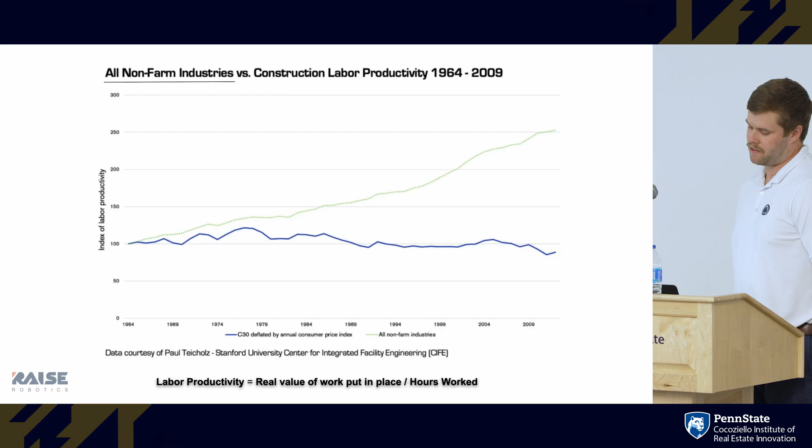When I was putting the slide deck together, everyone likes to point out that construction is not as productive as other industries. I was curious what industries construction was more productive than, specifically in the last 30 years. And the trend you'll notice is construction is more productive than labor-heavy industries, or industries that have significant regulations. This makes automation adoption in these industries very difficult.

And I think if you look at hospitality, it's low-skill work that you're trying to offset with the usage of automation. Obviously it's very challenging to get a very expensive robot flipping burgers to see a measurable ROI for small restaurant owners. We are still seeing advancements in both hospitality and healthcare, but it's not as wide of an opportunity as construction.

As the labor has continued to become more difficult to find, the price per head continues to go up. As such, the integration of automation and the decrease in price point for automation makes this very viable to integrate cost-effective automation and see real ROIs compared to manual labor.

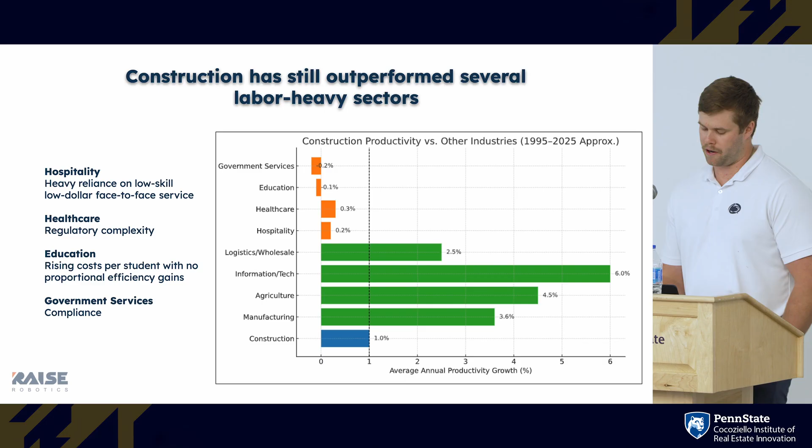Digging into the third and final obvious bucket for why automation is needed: safety is still a problem. Everyone's seen how things have changed in the last 20 years in construction. There's a lot of regulation and safety precautions put in place. It has improved safety, but it hasn't solved the entire problem, and that's the unfortunate truth. Construction is still the second most fatalities per industry, just lagging behind logging by a mere percentage point.

It accounts for 20% of all industry fatalities. Looking in the last two years specifically, there's actually been an increase in non-fatal recordables on site.

One statistic becoming very top of mind for contractors today is the growing issue with mental health within the industry. It's a stigmatized industry. People don't necessarily always feel appreciated, and they don't have a lot of the same benefits that other industry workers have. As such, you're four times more likely to see a construction worker committing suicide. Looking at 2022, there were over 6,000 construction worker suicides.

This also leads to an amalgamation of the safety statistics. Falls from leading edges are the number one cause of fatalities within construction, but we don't know what the actual cause of the fatality was, or if it was purposeful in nature. So this is something to keep an eye on.

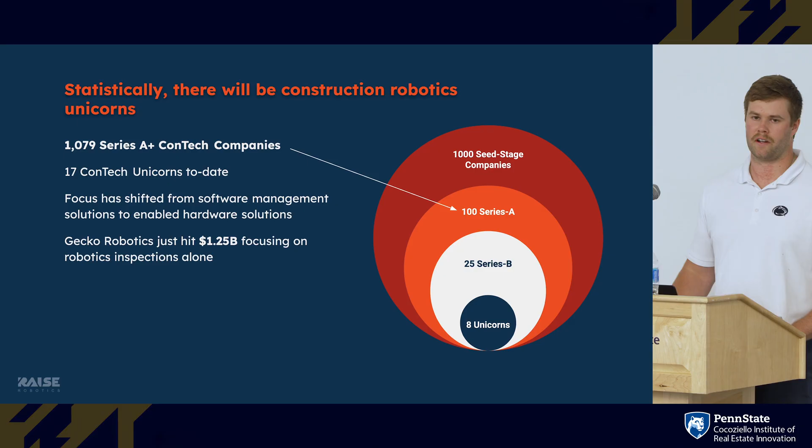And there's been some other complementary trends that have come to market over the last couple of years. The biggest one that ultimately enabled us to become a company was the commoditization of sensors and compute. Advanced technology has never been cheaper, largely due to advancements in autonomous vehicles, warehouse robotics, AMRs. Everything's coming down in price to the point where it's actually cost effective to prototype, test, and build within a dorm room, then come out of college and enter your product into market.

Additional levers that have influenced adoption have been the acceptance of AI. It can be a touchy subject, but largely the public recognizes the benefits and accepts AI solutions. The same goes for drones. Sorry about the redundancy on the first slide.

And then looking at manufacturing and academia. So I mentioned AMRs, vision systems are getting better. This is compounded by both bin picking in manufacturing facilities matched with academia. And collaborative robots have become mainstream in many manufacturing settings as well, so you're able to work around automation, which hasn't always been the case. Before you had to have very stringent safety and machine guarding, similar to a CNC machine, you were unable to actually collaborate with the robot, but now you are.

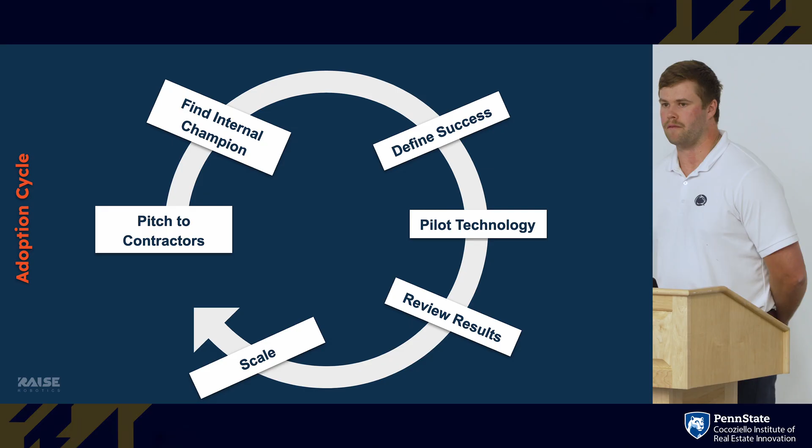For technology specifically, it's extremely important to find an internal champion within your organization that can help carry your message to other members and help run the numbers on the ROI calculations for the organization as well.

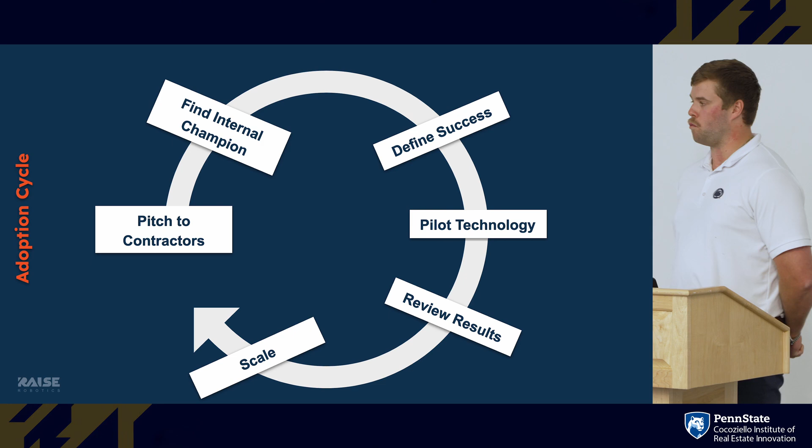Before you test on site, you have to establish success metrics. What we're doing now is establishing these success KPIs, and once these are achieved, it'll immediately turn into a larger scale adoption across the organization.

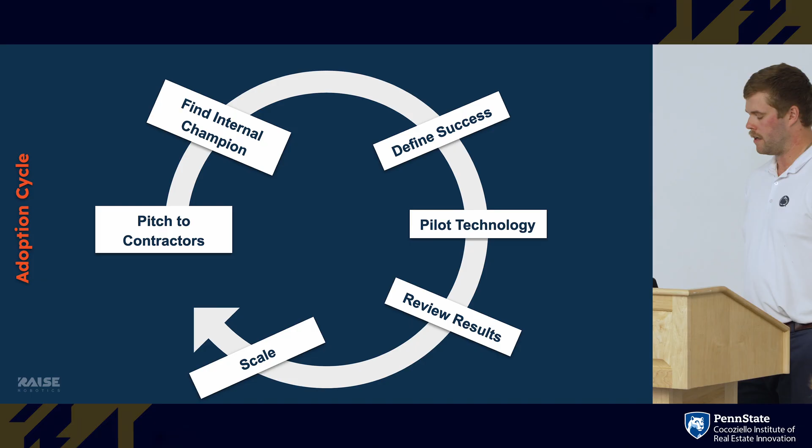Otherwise, you can get stuck in a loop between establishing KPIs, piloting, and reviewing results. After this has been accepted and the KPIs have been met, this is where you scale with the organization.

What we've seen time and time again from other companies in the space, and even ourselves, is getting stuck in this doom loop, pilot purgatory. This is largely due to regional fragmentation or company fragmentation.

Again, your project champion being on the innovation or VDC team doesn't necessarily mean they have the power to force organizational change. Having unrealistic success metrics that maybe you can't meet is another issue.

One example of this that we just ran into yesterday: we're getting ready for a TI project drilling dowel pockets in a very large retrofit. When we asked our project lead what the expectations were on cycle time, we were told between 30 and 50 holes per hour.

We worked with this contractor for two weeks before this and took cycle time measurements of their crews on site. In two weeks, they completed 200 holes total. But the metrics for adoption were now a quarter of that within an hour.

So it's important that you, as the startup, also do your diligence in the cycle time estimations. You come up with something that's reasonable at the end of the day.

Okay, then talking about the current robotics landscape. We're in a very, very exciting time for construction robotics right now. We're starting to see the commercialization of a lot of robotics companies, and they don't look like research projects. They look like real equipment, and they're being used as such.

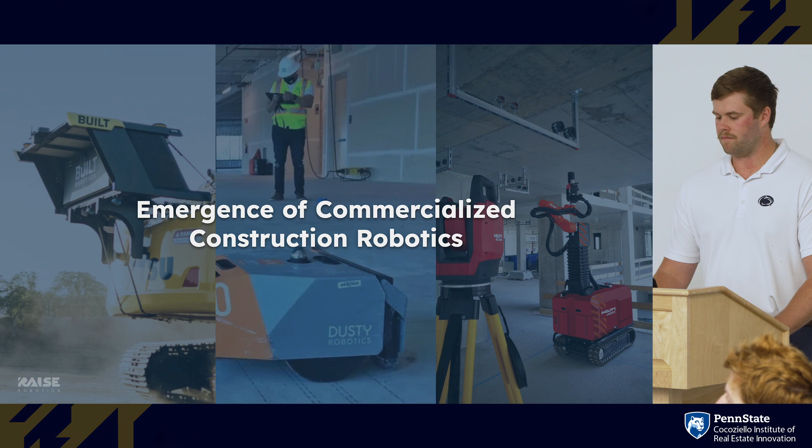You have your innovation trigger, which is a product that needs to be brought to market. Then the peak of inflated expectations—this is where there's way too much hype around certain solutions.

Trough of disillusionment—this is where people are going to say this is never going to work, there's no way forward. Slope of enlightenment—this is where there's a little bit better reception to adopting these technologies again. And then finally, when it's just a normal product in the market, this is the plateau of productivity.

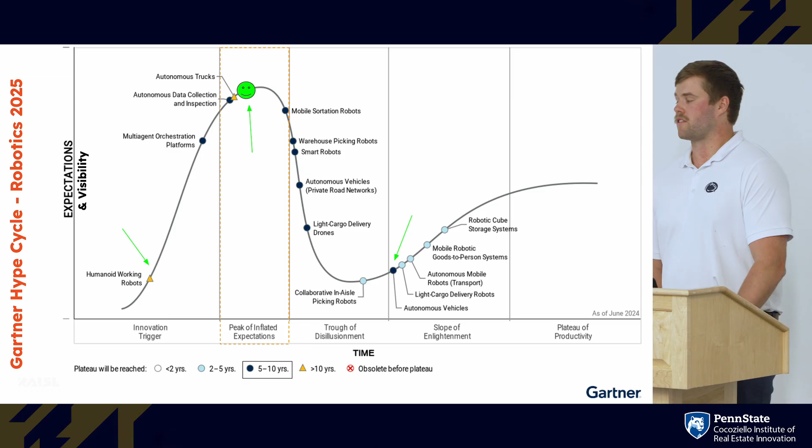If we look at this right now, I have to say, with as much hype as has been going into the space, largely the fact that we're seeing more executive teams leaving large tech companies, they're raising $100 million rounds with no product. There's definitely too much hype in the space right now. But there's still products adding value to customers. With the digital foundation items I mentioned for contractors, we're still a little ways away from that plateau of productivity. I'd say it's probably in the 5 to 10 year range right now.

So digging in a little to the on-site mobile robot taxonomy. What's out there? What are the classes? If you look at BuiltWorlds' classes, I don't necessarily agree with their taxonomy. This is kind of how we see it in the market.

So you have single-purpose robots. These are robots like Dusty, rugged layout robots, finishing robots, painting robots, just doing one targeted single application. The benefits of this: it's exceptional at a singular task, designed just for that task. I'd say this is similar to a specialized tool at the end of the day.

The cons: because it's only doing a singular task, if you're the contractor adopting this technology, say you're buying a layout robot, and your layout for a data center is going to take 10 days, 2 weeks. Unless you have 26 data centers, there's no way to get 100% utilization out of this equipment because it is single purpose in nature. As such, we see a lot of single-purpose robots get shelved, and this is a dynamic people are struggling with right now: how to optimize for uptime when just focusing on a singular task.

What ends up happening is the customers don't want to adopt on an annualized basis or purchase outright. We see that these suppliers then have to be in charge of the distribution, oversight, and logistics of the robots, since the customers won't adopt at a larger scale. So it's harder to scale, limited market channels since it's very specialized, but again, exceptional at doing that task.

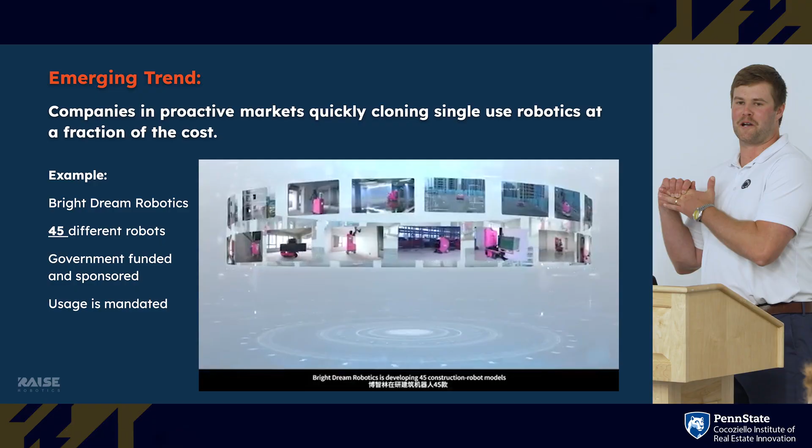I did want to talk about an emerging trend we're seeing in the market. Is anyone familiar with Bright Dream Robotics? No, you should be.

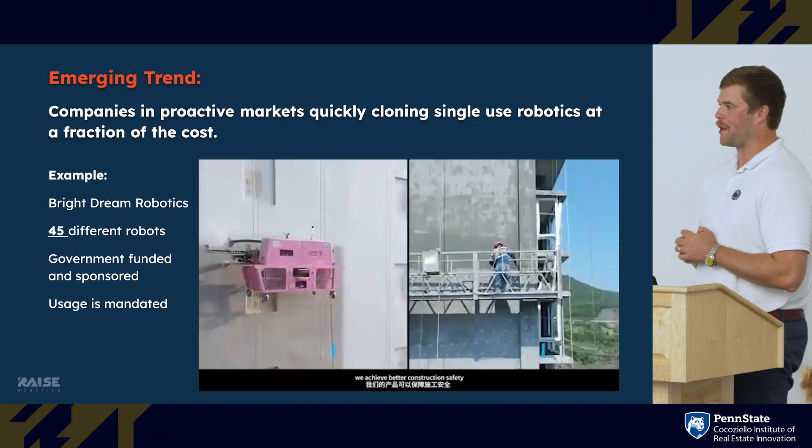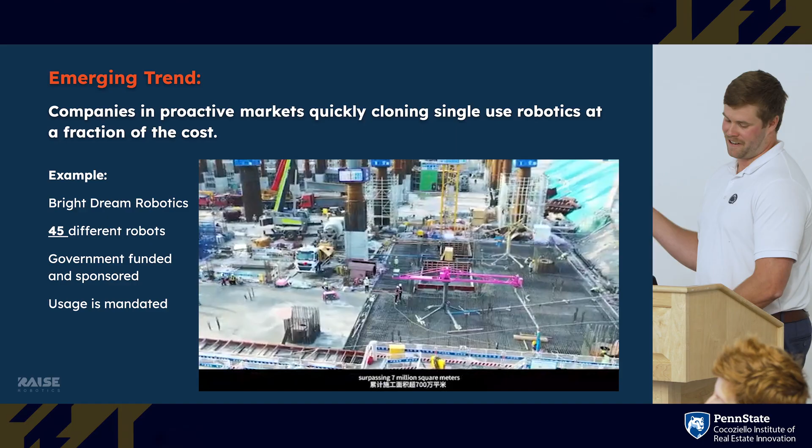So this is a trend we're seeing in proactive markets like China and Singapore right now, quickly cloning single-use robots that exist in the United States and Israel, scaling them with the support of the government. As such, you're seeing companies like Bright Dream, which have completed over 350 projects, have 45 different single-use robots, they're government-funded and sponsored, and the usage is mandated. So they have a very quick path forward being in this proactive market. This is something to keep an eye on.

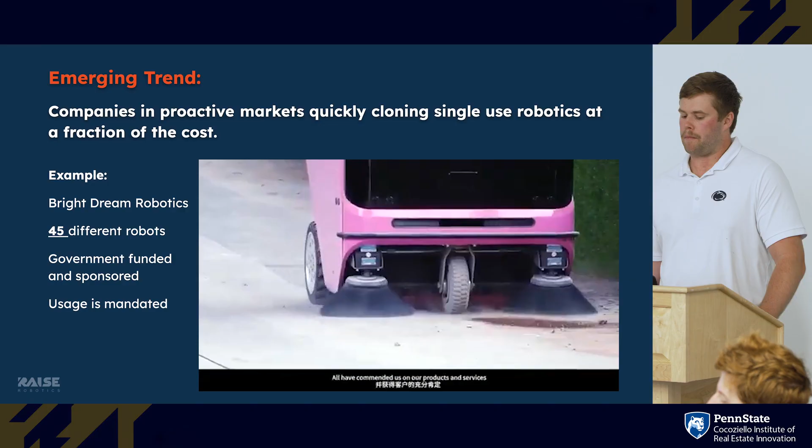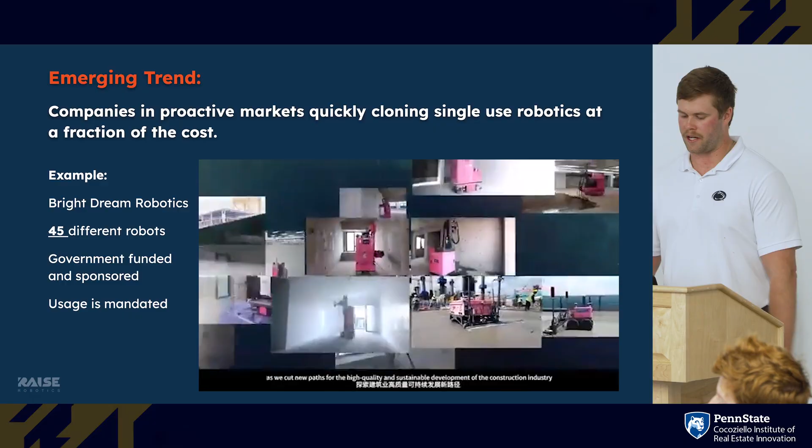One downside to companies like Bright Dream Robotics: it's very easy to clone and scale these solutions. It's not easy to clone and scale a high accuracy solution. So that's kind of the technical moat we're seeing in the marketplace between a proactive and reactive market right now.

Okay, did want to do a little role play. You're a general contractor looking to minimize project delivery risk on your upcoming project. Would you choose independent electrical, mechanical, and plumbing contractors, or one qualified contractor that could handle all three scopes of work?

Asking the audience, what are the risks associated with having more subcontractors? Whose fault is it if something goes wrong? Liability is definitely one of them. Any other answers? Conflict in scheduling? Yes, exactly.

So this is a similar kind of thought process that is going to be evolving with robotics in the future. Thinking 5-10 years in the future, does it make sense to have 100 robots doing 100 things on site? It's hard enough to manage subcontractors on a project. It's going to be impossible to manage robots that are all programmed in different languages, with no cohesive, universal oversight of these robots acting on the same project. This is why we're really leaning into that multi-purpose robot platform. It limits risk to those adopting it in the future.

And then taking a very broad stroke here, if you're studying construction robots, please don't be scared with this oversimplification. I've broken it down into five primary buckets. Pretty much every construction robot works the exact same.

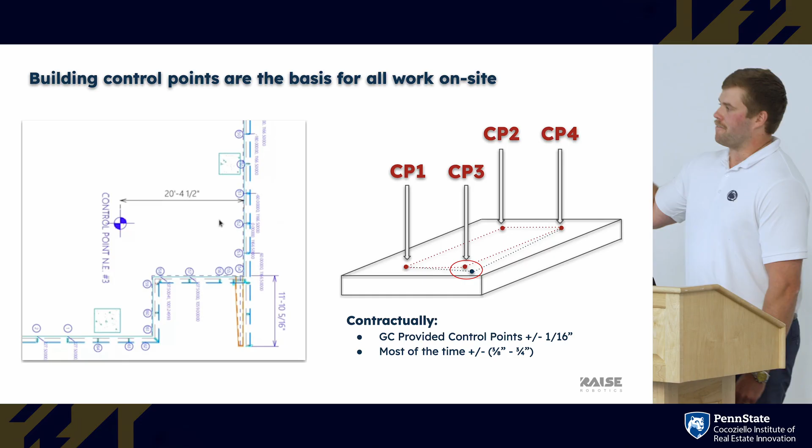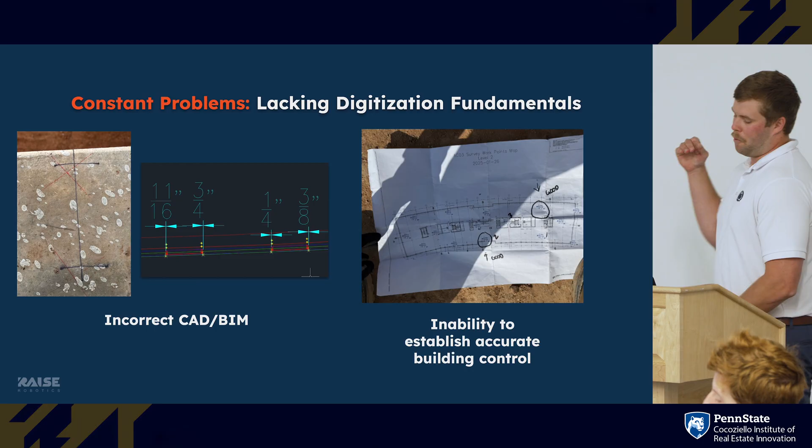One thing that we notice outside of control being an issue is that we're receiving incorrect digital inputs. This comes by way of CAD and BIM. This is directly from a previous project. On this drawing, this is the overlay of a glazing contractor and a precaster. All of these are supposed to be 0, 0. These should be perfectly overlaid on the CAD outputs. Almost an inch error, 3/4 inch error.

What we ended up finding is the general contractor submitted 2 different drawing sets to each contractor. They fabricated components to 2 separate, completely different drawings. As such, we're laying out with the robot. We notice that the precaster's coming over, and we're like, that looks weird. We should be dead nuts. We're at a 32nd in the lab. We don't understand what the problem is. Dig into the drawings, huge issues with the drawing sets.

Same project, these are our control points. We get on site, instantly flag control issues, escalate it to the general contractor on site. They send out their surveyor and field engineering team to lay out 15 points. They say, we'll make sure the job site's covered, you'll have all the points you need. 15 points, we get 2 good points that are within the allowable tolerances.

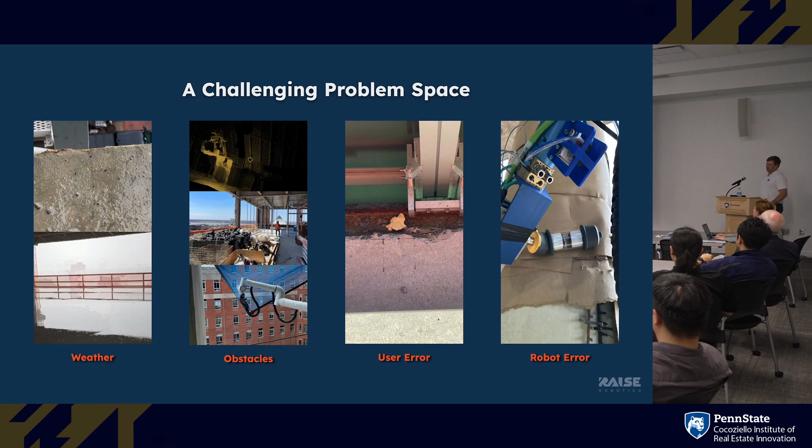Outside of this, it's obviously, looking at it from the robotics perspective, a very challenging problem space. This is also what makes it very exciting for the suppliers and technologists in this space. You're applying manufacturing level accuracy to a dynamic environment. You have robots working outside in weather. You have new obstacles that pop up on every single job site, every day, every hour. Your path of travel gets blocked. Ultimately it really tests your communication with others on site.

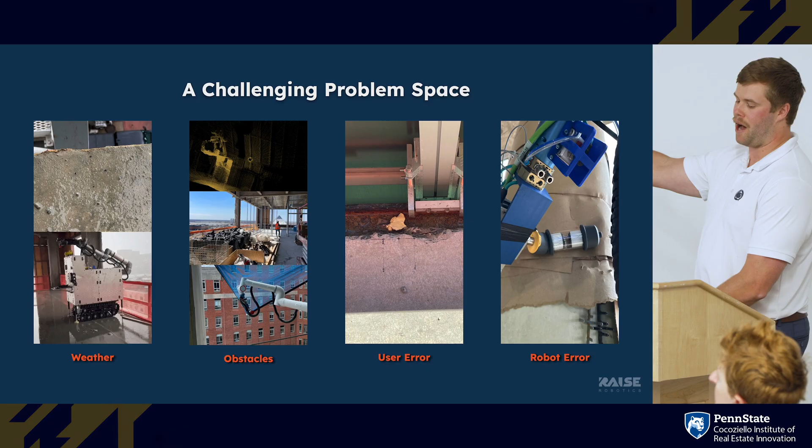And then you can still run into issues with both user error, incorrect inputs, incorrect drawings, or robot error. A condition was not modeled in our rendering for the robot. We forgot to add the reflector to the end of our robot. We path planned without the reflector, ran into a column and broke the reflector. These are all things that happen during this kind of innovation, development, deployment lifecycle.

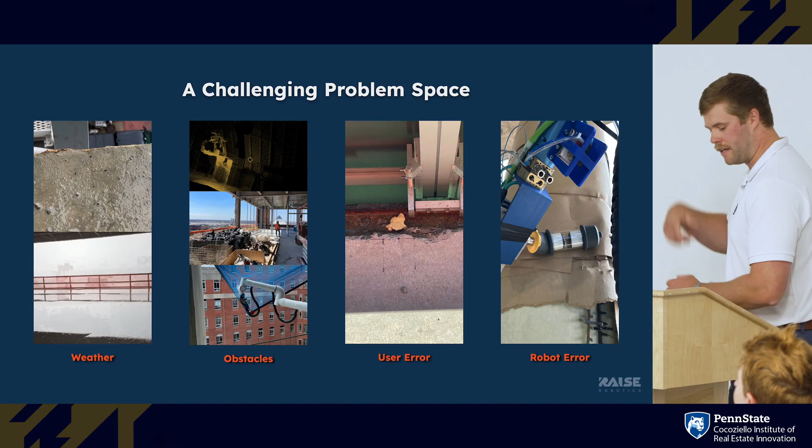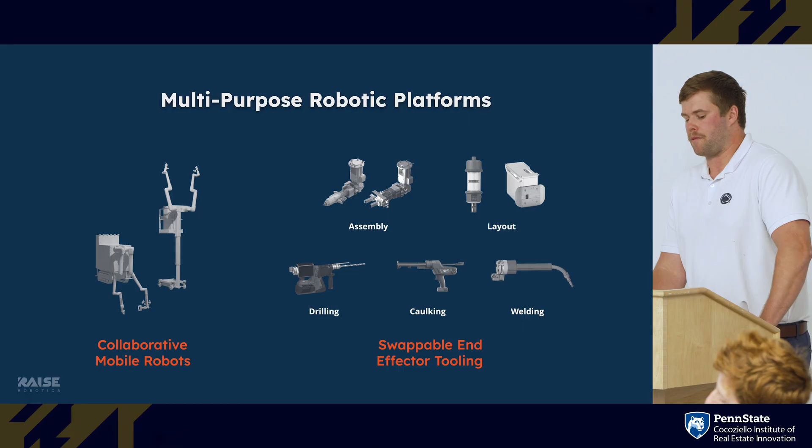All right, moving on. Our company, Raise Robotics. Again, what we're building: multi-purpose collaborative mobile robots for on-site construction and industrial applications.

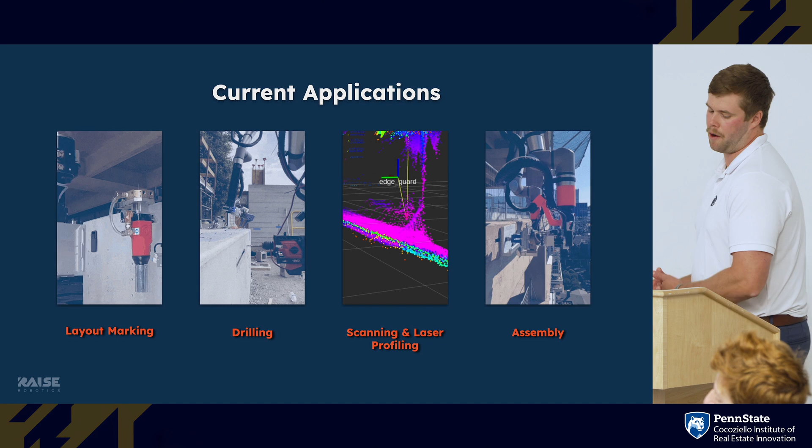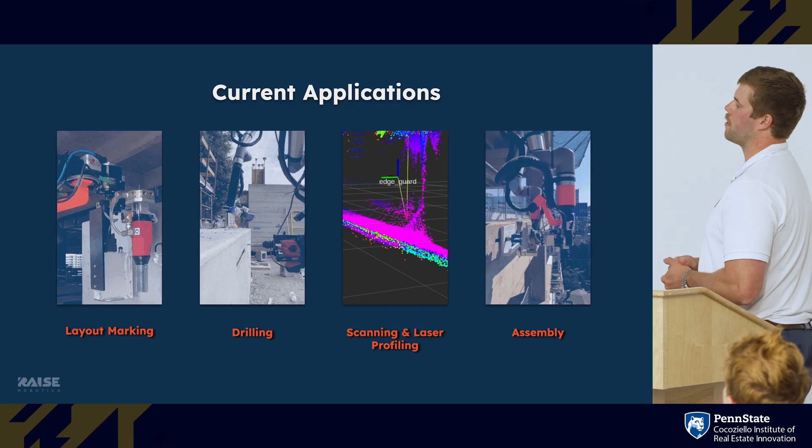As far as our applications that we're focused on right now, it's primarily leading edge applications. That's where we're servicing layout marking, any geometries, text, emojis. We can print them on the slab while working behind the edge guarding. This is leading edge, walls, ceilings, up to 13 feet. We are partnering with a mobile equipment lift provider that will allow us to apply all of our technologies into scissor lifts and boom lifts here in the next 6 months.

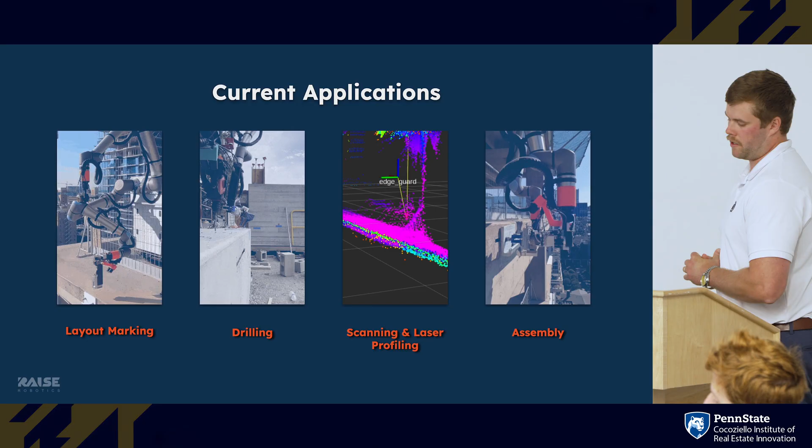In addition to layout marking, working in drilling, scanning, and laser profiling, as well as assembly of facade systems. This is just another quick video from some previous project work.

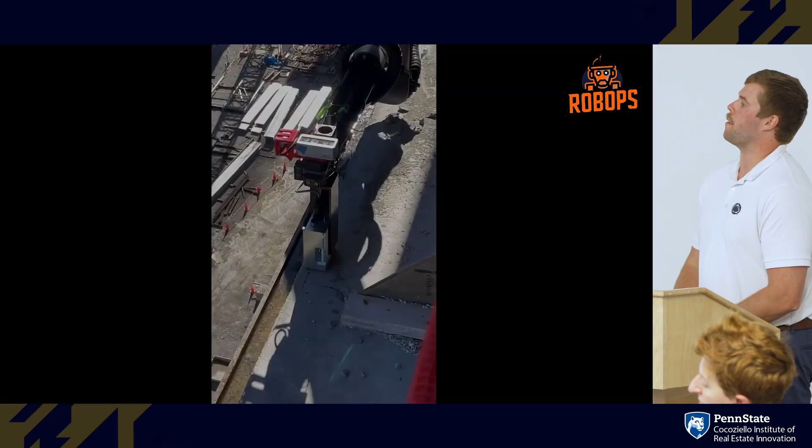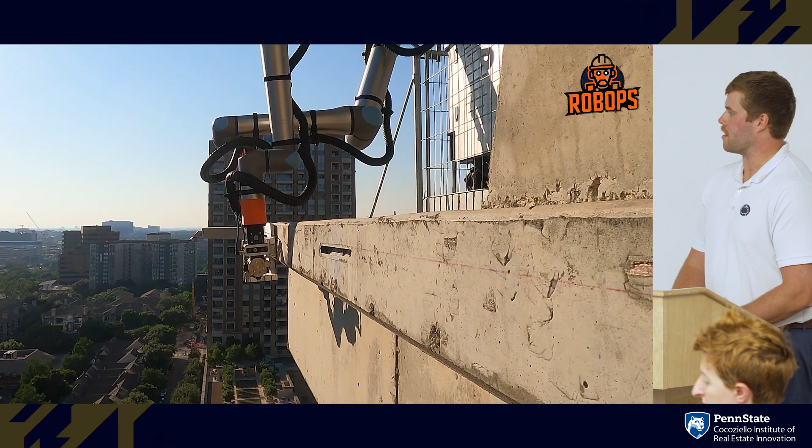We have both single arm and dual arm robots. On the back of the robots there is essentially a toolbox, very similar to a CNC machine and how it's able to actually swap between the tools. It's all pneumatic actuation. The entire robot is IP65 rated, so it does stay outside for the duration of projects. When it gets shipped to a project, it gets shipped on a flatbed, untarped, similar to any construction equipment.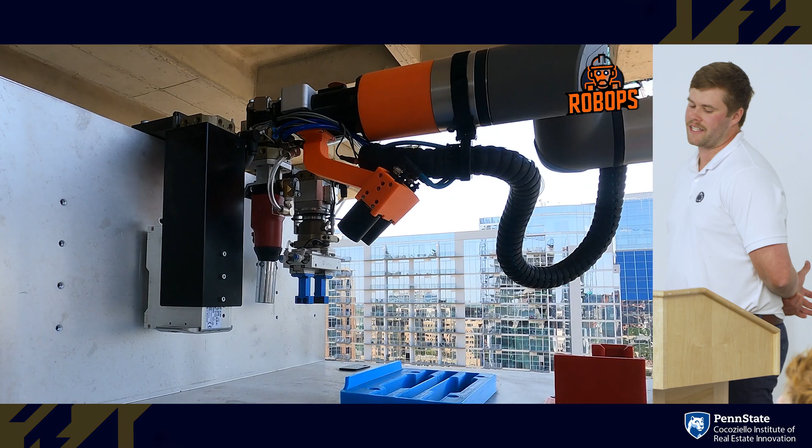You can see here computer vision outputs, applying a lot of that same AV technology for human and obstacle recognition into component recognition that allows us to actually interact with multi-step assemblies and ultimately install these brackets faster than a crew can do it.

One of the major benefits with the application of robotics within construction is the ability to collect data passively. This is a massive benefit. Robots are data magnets. You don't need a QC QA team to come back and actually check work. The robot can complete that while the work is in progress, unlocking further benefits in production rates.

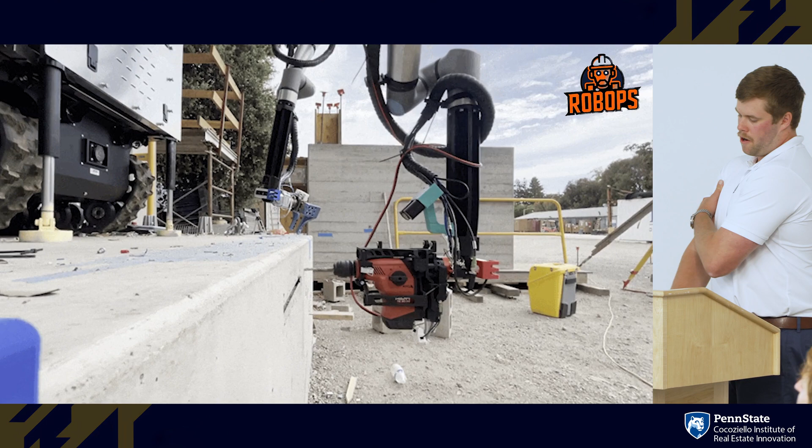And then here we got our drill. We've co-developed this alongside Hilti. We're scaling up this line of business significantly in the next couple of months.

Our market sectors: new build commercial construction, focused on self-perform general contractors as well as facade specialty subcontractors. TIs, we're kicking off our first industrial manufacturing applications, for an EPF manufacturer who does tanks, vessels, and skids, marking where things need to be cut, where they need to be welded, how they need to be welded, using the laser profiler to also inspect the components coming in to give them a right of refusal for $100,000, $200,000 components.

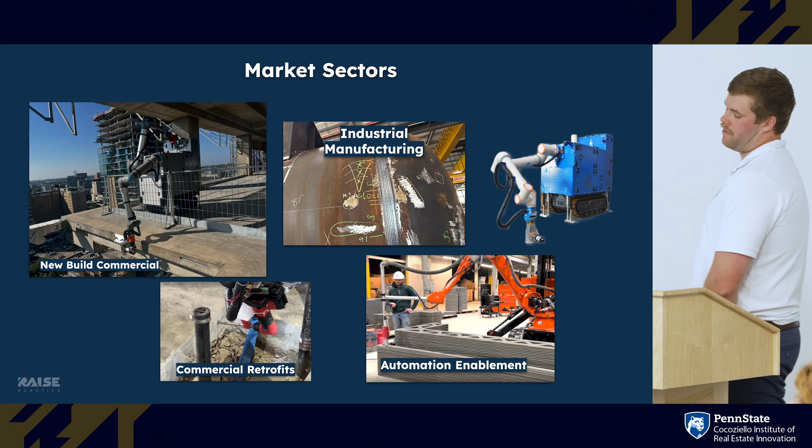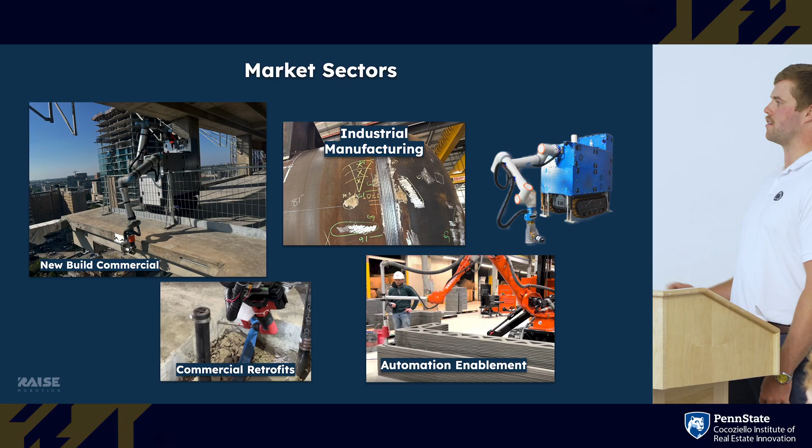What makes us us at the end of the day? Our positioning—our localization stack—we're able to achieve plus or minus 1/16 inch in field conditions on a very large machine, and we will be achieving that same tolerance even at height. This comes down to how our robots are calibrated and how we're able to overcome a very dynamic environment.

Our vision and motion planning is what ultimately allows us to work off very minimal information. A lot of robotics providers now require BIM inputs. The reality is many contractors don't have BIM inputs; they have 2D plans that are in the field in a job box. That's all our robot needs to get working, because we're able to fill in those knowledge gaps with the live inputs from our vision and motion planning softwares.

And then haptics—force sensing and feedback—being able to complete work blindly. For our bracket installation use case, we're able to train a model to actually install a bracket without seeing anything from the computer vision inputs. It's very similar to changing your oil in the blind. We're able to feel when those bolts were slotted within the anchor channel to actually complete an installation.

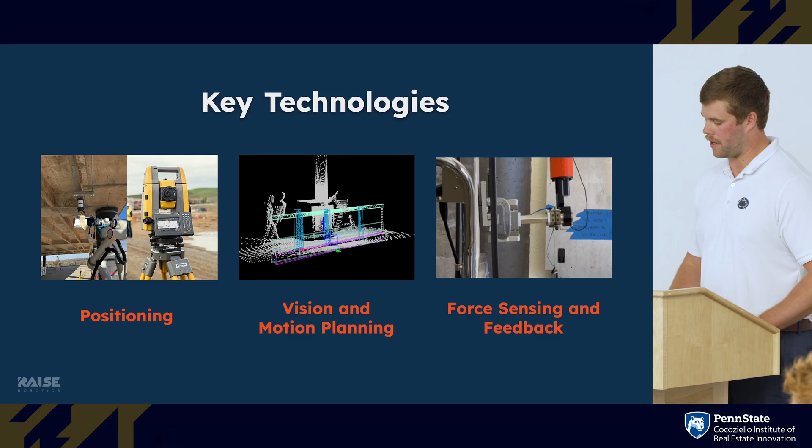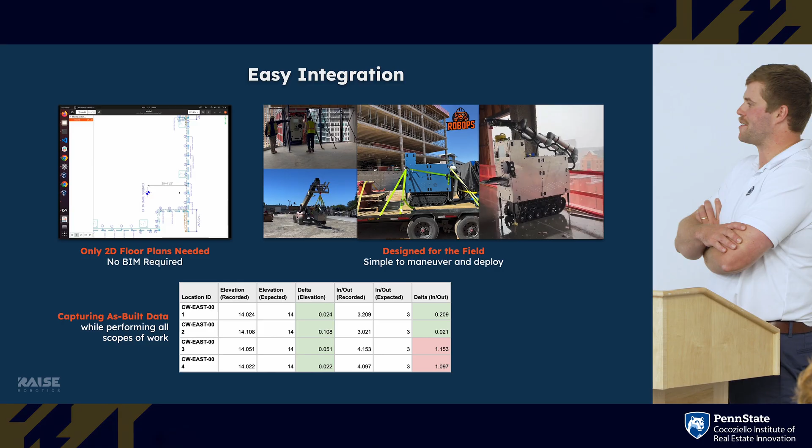Even furthermore, building out robustness in the software capabilities and ensuring that worst case scenario, if the vision system goes down, we're not losing a bracket off the side of a building. This leads to increased ease of integration for our contract partners. We're not reinventing the wheel with inputs required to the robots. That's a massive undertaking and a huge issue for a lot of other construction robotics companies that require BIM integration and BIM inputs. They end up having to upsell BIM services on top of the robot rentals, really pricing themselves out of the market. We're designed for the field—deliver on a flatbed, fit in the smallest hoist.

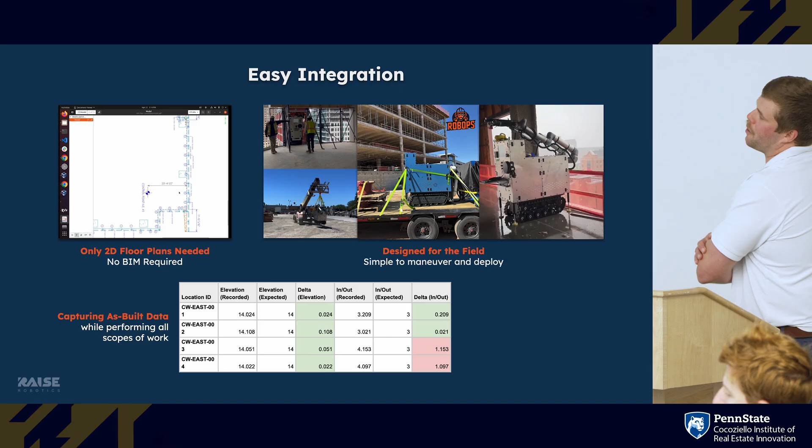We've just shaved off 300 pounds from the robot with this scissor lift integration. So it will look a little bit different, but it'll be using the same back end, same tooling.

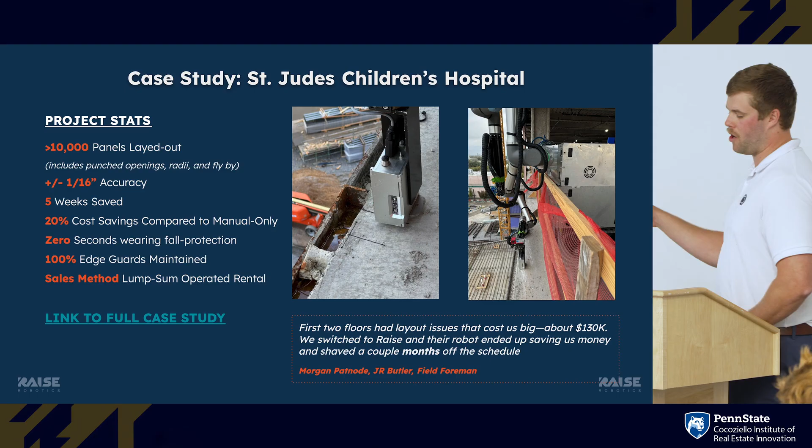One recent case study from St. Jude's Children's Hospital: completed the layout for a 14-story hospital building at plus or minus 1/16 of an inch accuracy, shaved off 5 weeks of the schedule, 20% cost savings compared to manual-only methods. No time spent beyond the edge guarding, so 100% committal to ensuring safety of today's workers. No high lines needed to be set up. And for this project, it was a lump sum operated rental.

I will say there is a lot of pressure on suppliers like ourselves to provide the staff to either oversee, set up, or use the products. Many customers want just a drag and drop adoption. They don't want to facilitate the upskilling of their internal teams to adopt.

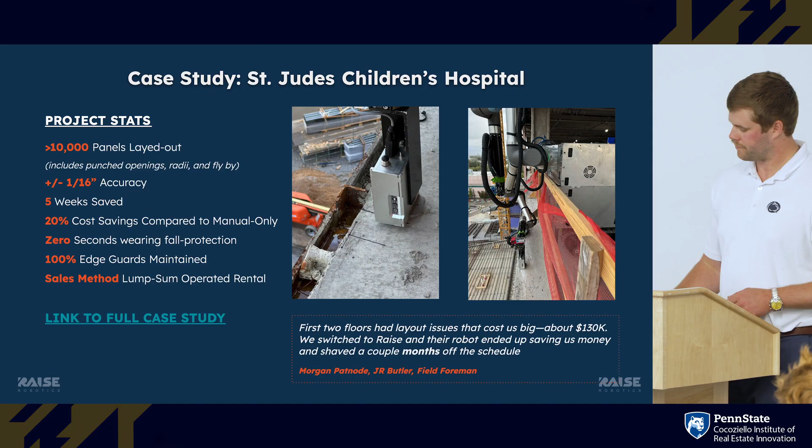Okay, so right now we've completed over 4,000 hours in operation. I think one thing that is very different for us, we're partnered with the unions. Our approach has always been improving safety, improving the longevity of careers within construction, while also attracting the next generation of construction workers. We kicked off our first Train the Trainer series about 2 weeks ago down in Philadelphia. Trained 12 union employees, gave them a test, and all 12 passed, which is a testament to the ease of use for our robots.

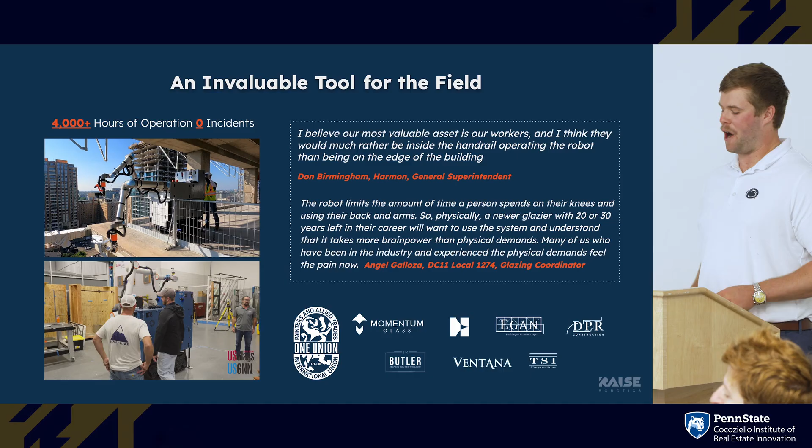We did have some passionate conversations during that meeting as well, and it really showed where a lot of tradespeople are at in viewing automation. Immediately, it was a high-tension training for the first 2-3 hours, and you could feel something was bubbling in the room. Someone raised their hand and said, this is taking my job. They said, if you're doing multiple applications, it's taking more of our jobs. And it turned into a town hall debate between two sides of the room.

You had union people that view it as a tool or a piece of equipment - something that improves our livelihood, improves accuracy, ultimately enables more work to be won from contractors using the technology - versus the people that were just scared of technology. It's a very real fear that's in the market now. By the end of the conversation, it devolved to a point where we were debating what is the purpose of being a human at the end of the day.

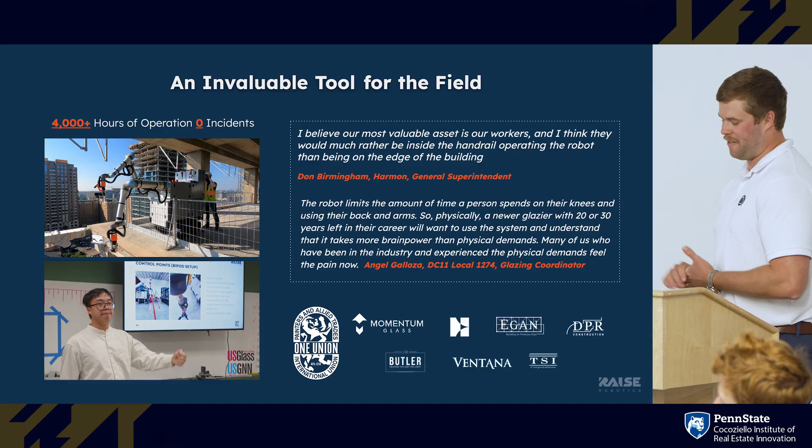So there's still speculation. The reason I brought that up - by the end of the class, everyone said they saw the robot as a tool, and it is something they would use, which is a testament to usability, but also you've got to demystify these things.

If you look at the video here, the first thing that we did when we got the robot in the classroom, they said, take off the side panels, we want to see what's inside. So we did, we took it apart. Everyone was able to touch everything on the robot. When you see components that you recognize, like an onboard compressor, that's a pretty cool compressor - there are items that are shared experiences that enable a more demystified release of technology and adoption of technology.

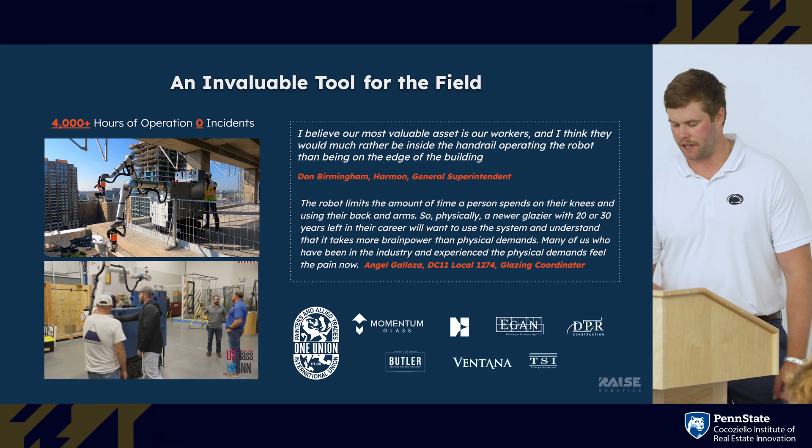So where we're going in the future and where we're going right now - we are expanding our tooling and applications. We're applying our scanning, so this is our as-built data collection surface profiler, as well as the layout marking tool, to industrial applications in manufacturing - marking where welds need to be, where cuts need to happen. We're going to be developing a fusion cutter as well, a plasma cutter, to actually cut through the skins and complete the work at hand.

And again, we are partnering with 2 large MEWP OEMs to white label our robots on their platforms. In addition, we'll continue to scale our software licensing - this is our localization stack, our motion planning, path planning, etc.

Okay, switching gears a little bit, just advice for students. Looking at my career to date in review, I'm doing exactly what I wanted to do. It's really a combination of all the things I love - you have the statics aspect, the dynamics aspect, parts of structures, a lot of design thrown in, a lot of business development. You get to wear a ton of hats. It's really everything that I hoped for in a career and I didn't find to date, so I'm hoping to enable more people to get into construction technology.

Asking the students, this is something I struggled with - does anyone here feel anxious about their career or about their major choice at the moment?

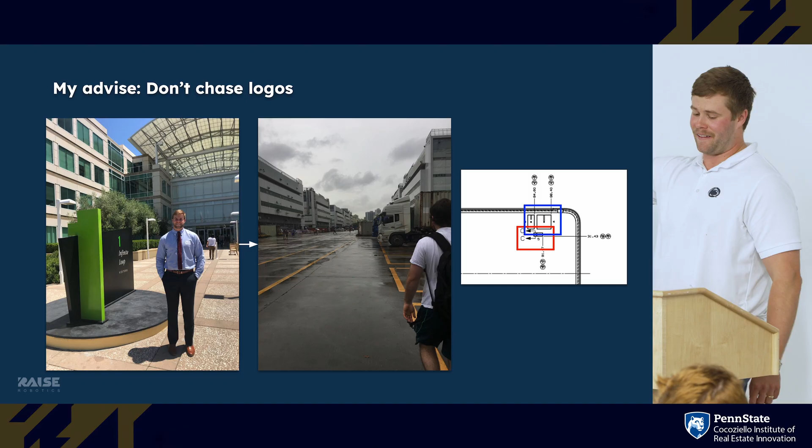The photo on the left, my parents took on my first day of work. The photo on the right is my first day in Foxconn, 10 days later. This was half of my life, was just in Foxconn. Very dreary, very depressing, and just very different.

So again, my advice is don't chase the name, the company name you want to put on your LinkedIn page for social validation from others. It is cool, it is fun. I don't think it's worth it at all.

Like my entire career very well could have been me working on the placement and adhesion of two magnets inside of an iPad keyboard. Low impact. And with these larger corporations of great stature, you're also just limited in what you can work on. Again, this is a prime example. Two magnets. I didn't even get all of the magnets. That was someone else's job.

And in these large companies, there's very bureaucratic structure, and there's a way for things to get done. There's really not much room for innovation in the large corporations. So keep that in mind as you're structuring yourself for a career. Everyone wants to make an impact. Everyone wants to feel as though they mean something to their team. Large company, at least in my experience, not where you get that.

So stepping back, you're looking at a career in construction technology. What is my advice? How do you break in? This is, aside from passion projects, the most important aspect for any position we hire, whether it be robotics engineers that have PhDs or material scientists, software guys.

If you have field experience, you're going way up in our hiring list because you understand the process on job sites. If you're designing in a siloed environment, you don't understand what it means to actually integrate something into the existing workflow. If you're a contractor adopting it and it doesn't fit into your workflow, you're not going to use it.

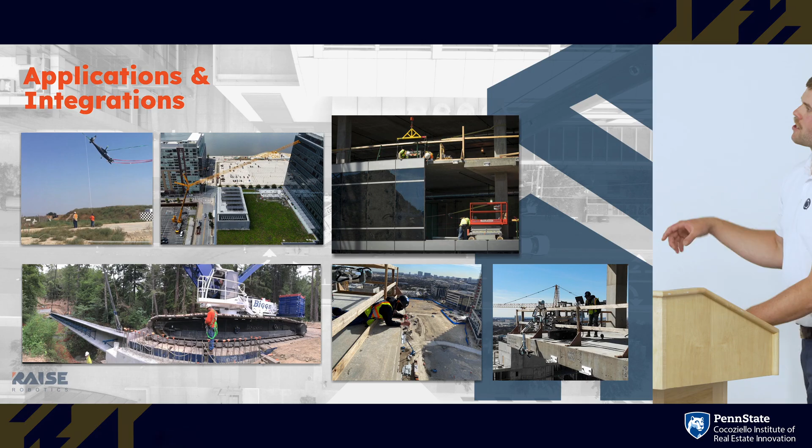It was the installation of the brackets that actually dictated the alignment of the panels. The same goes for their layout markings along the building edge. These are what ultimately tell you where to put the panel. If we didn't go on site, we wouldn't have uncovered the root cause of our initial problems in the field. Ultimately, this is why we started with the facade bracket installation use case.

And then expanding upon getting in the field again, that's, I think, the most important part. Build a diverse engineering background, as mentioned earlier. Take electives in areas that you're truly passionate about, even if they're completely different than what you're focused on right now. Be curious, ask questions.

You're gonna be talking to a lot of contractors getting into the field. There's no dumb question, quite honestly. There's just questions that other people are thinking and have not asked, and that is the reality. If you sit in a contractor meeting with 15, 20 people, no one really asks questions, but when you ask a question, it becomes very obvious that everyone was thinking the same thing.

Again, personal projects, be a good communicator, specifically if you're gonna be in robotics. There's so much cross-team collaboration between software, hardware, customer teams, contract teams, operations. You have to be an efficient communicator between teams, being able to deliver the same message in different ways.

And finally, be an empathetic listener. No one's going to explicitly tell you they have a problem in the field. It's up to you to really pick up on those social cues in conversation.